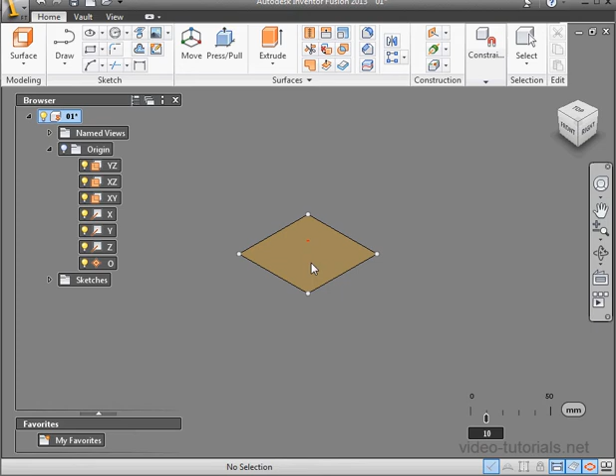Let's begin with a new sketch. Now activate the Rectangle tool, and draw something like this. Stop sketch, and let's right-click on the region and select Extrude. I'll just drag the handle. OK, and let's click OK.

Next, I'm going to create a fillet. First, I'll select the edges to which I'll apply the fillet, then right-click and select the tool. Next, we enter the radius value or just drag the handle: 5 millimeters.

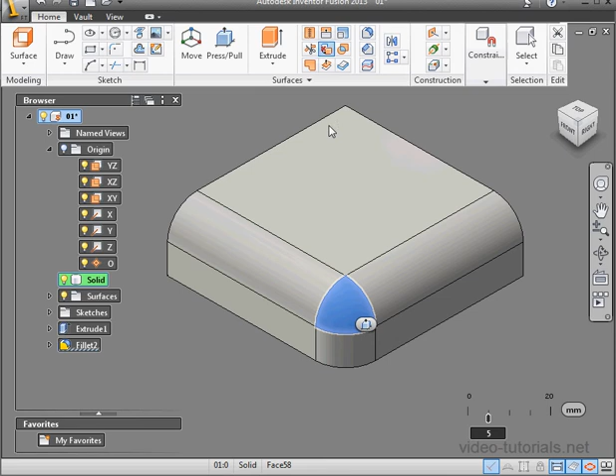Next, let's select this face and I'll delete it, and then we'll learn how to patch the hole. All right, here's our hole. Let's bring up the Patch Merge tool. Notice that chaining is toggled on.

Let's select one of the edges of the fillet, and here is the result of the patch. Let's click OK. Note that a solid wasn't created since we have two separate surfaces. OK, let's undo that patch.

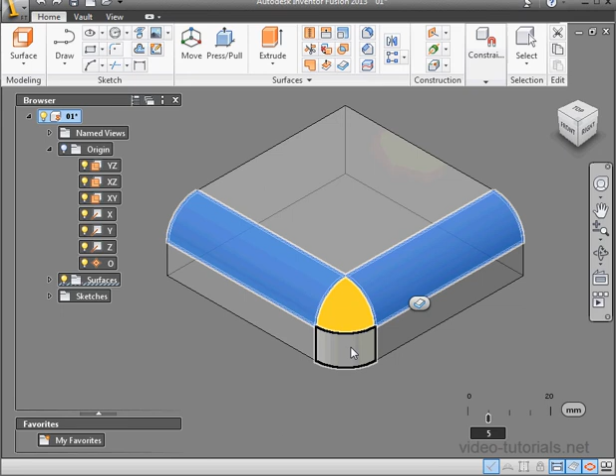Now let me shift select these three faces, and I'll delete them also. Activate the Patch Merge tool again. Let's select an edge. Because chaining is active, all of the adjacent edges are selected. Let's click OK. What we've done is replace three faces with a single face.

However, you can see that the geometry is different. The surface curvature isn't the same. Let's undo that, and let's try to patch the hole in a different way.

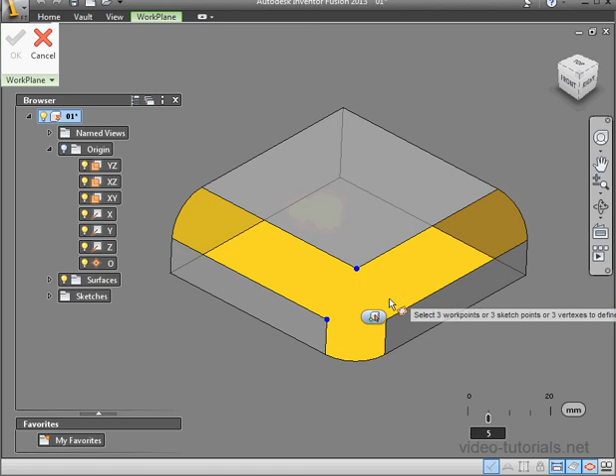I'm going to create a support plane first. We'll do it by 3 points. Here's my first point, here's my second point, and point number 3. There's my new plane.

Let's create a sketch on the new plane. Activate the Project Geometry tool. We'll project this point and point number 3. Now let's bring in the Draw tool. We'll create a closed profile, a triangle, and stop the sketch.

Activate the Patch tool. Let's toggle chaining off. Now we'll select the edges to patch. We select them manually since chaining is off. And let's click OK.

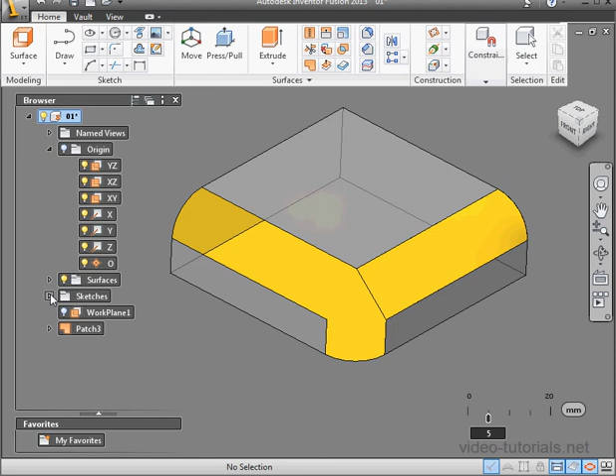Let's make sketch 2 visible. Activate the Patch tool again. Unselect chaining. Now select the edges to patch, and click OK.

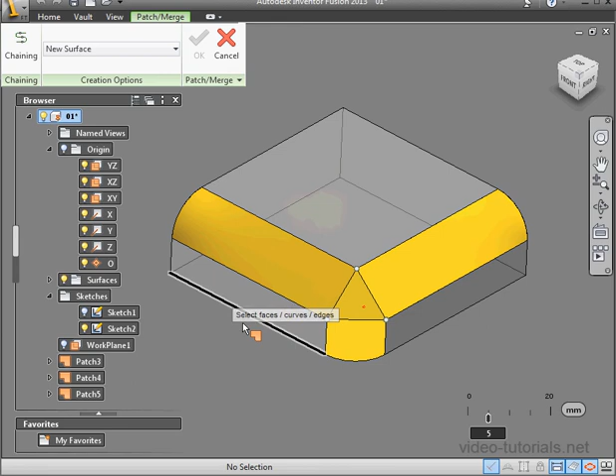We'll do that again. Click OK. Last one, unselect chaining. Select the edges to patch, and this curved edge. And click OK.

And here's our patch. As you can see, the surface curvature looks quite a bit different than in my previous example. Since we have some straight lines here, it's easy to do patchwork. There's no gaps between the surfaces.

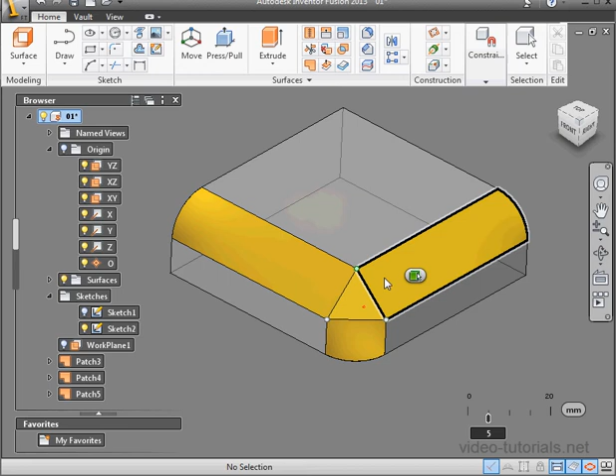I can even stitch these surfaces together without flipping them inside out. Let's try it out. Activate the Stitch command. Now press down Ctrl on your keyboard, and then use a window selection from right to left. And let's click OK.

Inventor was able to create the solid. I have the node in the browser tree here. Let's undo that, and let's learn how else we can patch these gaps.

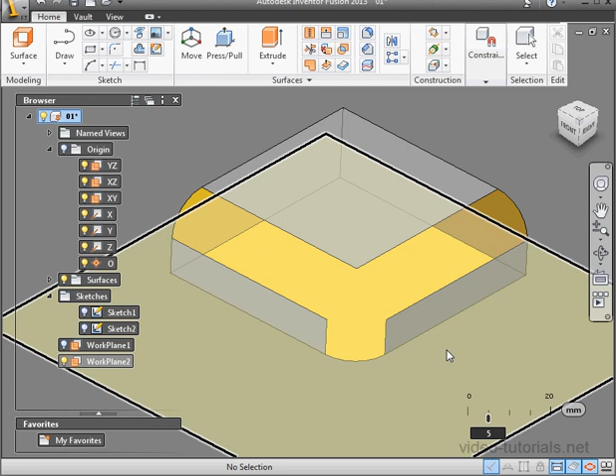Let's create some more support geometry. We'll create a plane by 2 axes. This edge and this edge will be my axes. Now right-click, New Sketch.

Activate Project Geometry, and we'll project this edge. And exit our sketch by clicking Stop Sketch.

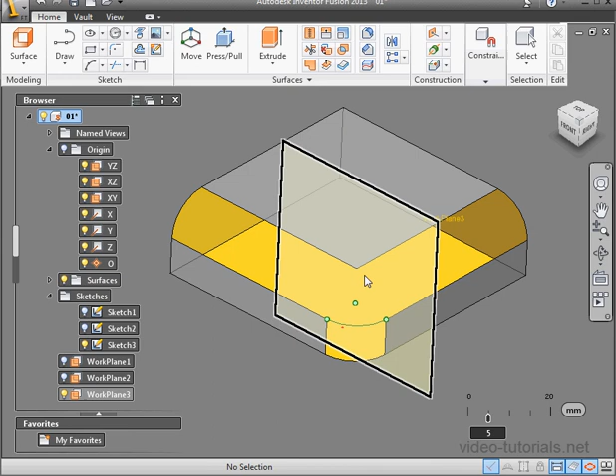Let's insert another support plane, this time by point and axis. Select this edge and this point. Now right-click on my plane and select New Sketch. Activate Project Geometry; we'll project this point and this point.

And now let's bring in a 3-point arc. First point, second point, and third point. Escape to exit the tool.

Let's select the arc. Select the Dimension tool, and let's select this edge. And let's stop the sketch.

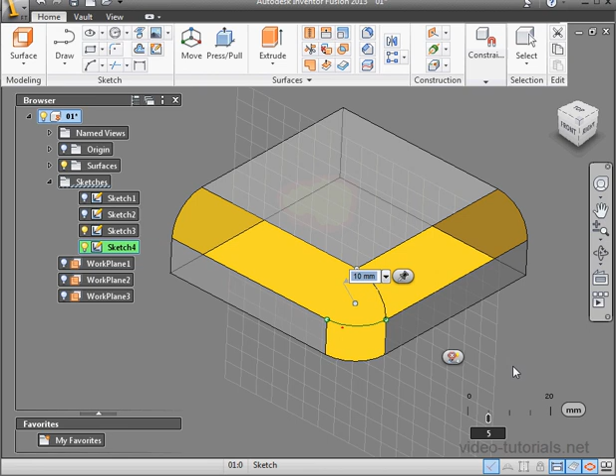I'm going to create one more support plane. It'll be by 3 points. First point, second point, and here's my third point.

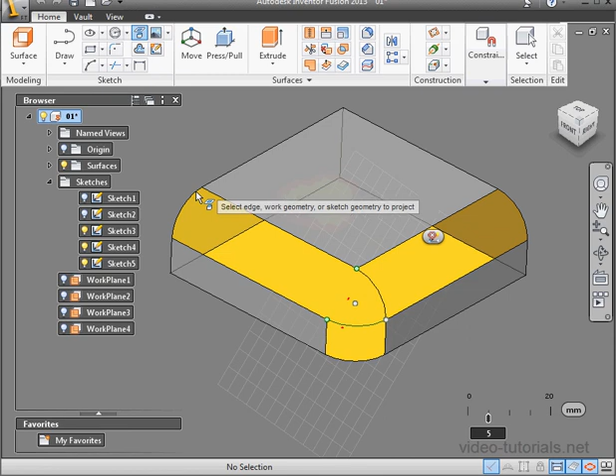Now let's insert a sketch on this new plane. Activate the Project Geometry tool, and I'll select this edge here to project, and this edge.

Now let's bring in the Draw tool. Escape to exit the tool. Let's shift select the line here and the second line, and we'll apply a collinear constraint. Let's do it again.

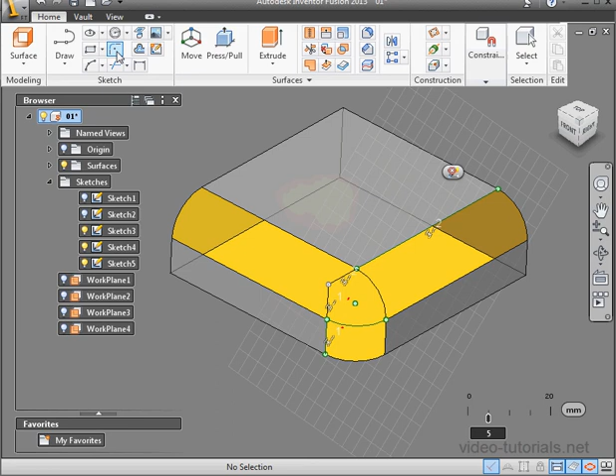Activate the Fillet command now. I'll select these two lines. For the radius, let's input 10 millimeters, enter, and click OK.

And exit the sketch. Let's activate the Patch tool again. Chaining is unselected. Let's select our edges, and let's click OK.

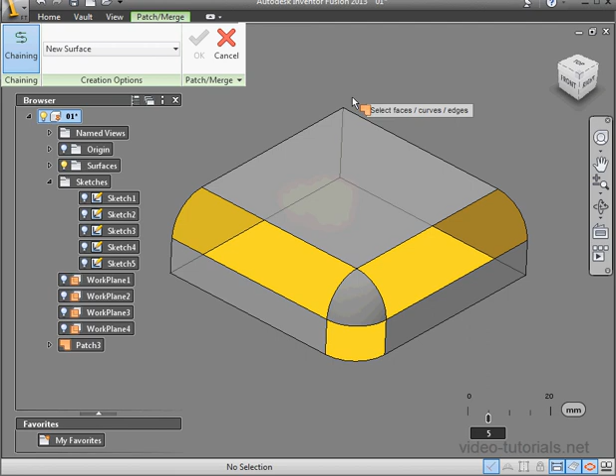Let's activate the Patch tool again. Select the edges; chaining is selected this time. Let's select this face as well, and click OK.

And now let's stitch these surfaces together. We'll do a Control Window Select, right to left, and click OK. And here is our solid.

And this concludes our tutorial about the Patch Merge tool in Inventor Fusion.